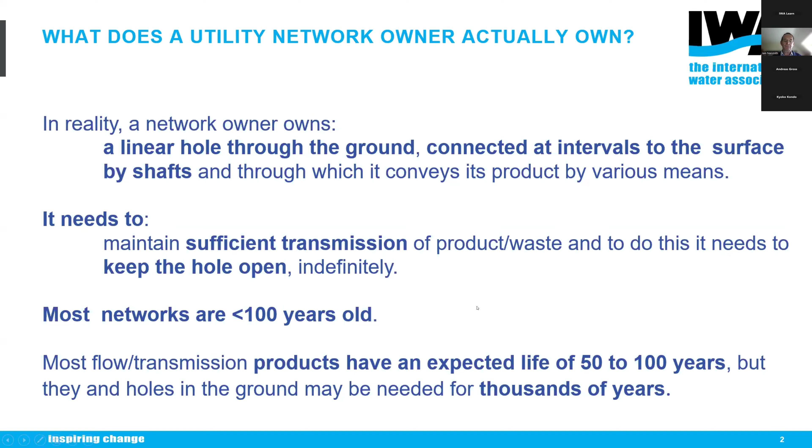So when we look at an urban or indeed a rural environment, the things which allow us to have this civilization relate very much to the utilities that we must connect. And so the first thing I would say about the ISTT is we are a society for all utilities, not just water. So it's gas and district heating, it's electricity, water, wastewater, communications, and let's not forget urban drainage.

And when you look under the ground, you will find a vast array of pipes laid out, as most of you will know, not normally looking as neat as this does in our diagram. By the way, these diagrams are on the ISTT website if you wish to use them. It's a real mixture down there. We don't know what is there. We don't necessarily know where it is.

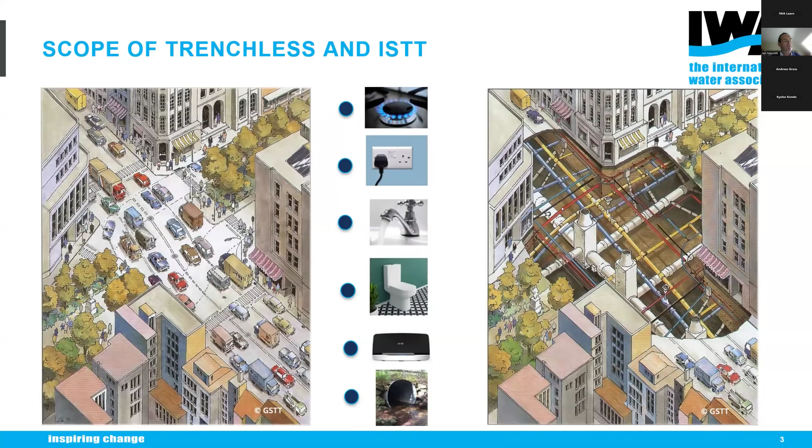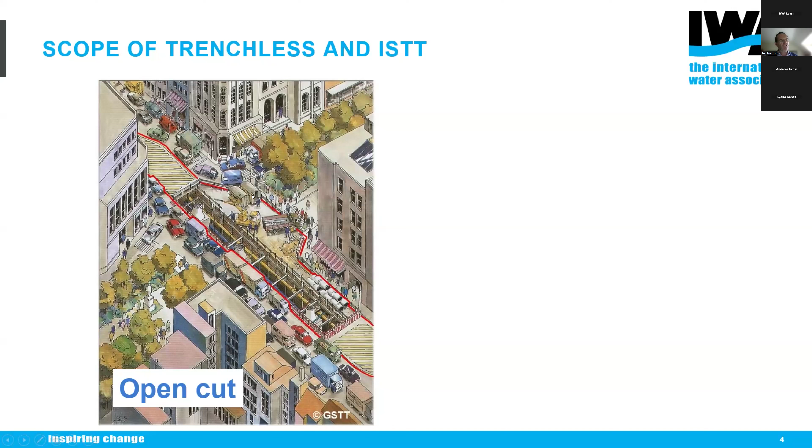And ideally, we don't want to have to dig it up because our conventional method of dealing with it has been open cut, where we excavate a trench big enough for humans to go inside to do the task. In this case, this illustration is laying some new sewer pipe and manholes, and it causes disruption. The role of trenchless in this instance is to reduce this.

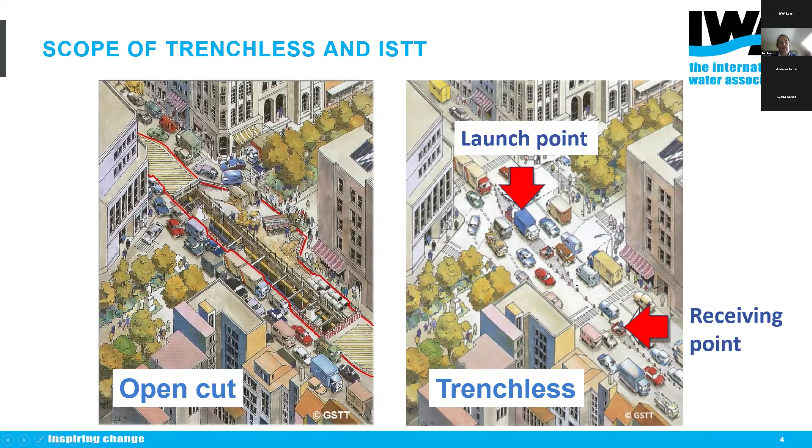So with trenchless, we're looking to have a launch point and a receiving point for whatever exercise or technology we are using that minimizes this amount of disruption that is going to take place. And so what we then have to consider is what are all these technologies that we are calling trenchless? And as a result of decades of work at the ISTT, we've come up with a sort of breakdown of what we consider to be trenchless.

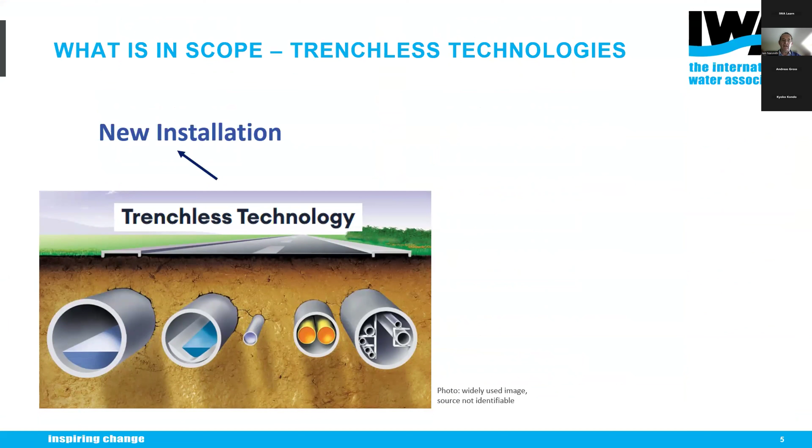So when we look at trenchless, we see that, first of all, it's about new installation. It's about trying to put either new mains or property connections in without having to disrupt the surface. We then have to consider how do we keep all this maintained over the long term? And we call this rehabilitation. That's the title it falls under for us.

And there's three elements. We're going to repair localized issues. We're going to renovate as we need to, to extend the life. But at some point, we're going to have to replace. So those are the three areas of rehabilitation.

But in order to be able to decide where we're going to install, and how we're going to rehabilitate, we need to understand the condition of our asset. How is it deteriorating? What are the problems that we've got to address? And we also need to understand what we call site investigation, which is perhaps where we want to access it or where we want to drive a new pipe through. We have to decide what's the safest route. We have to decide what's the best technique. So these are the three areas of trenchless technology.

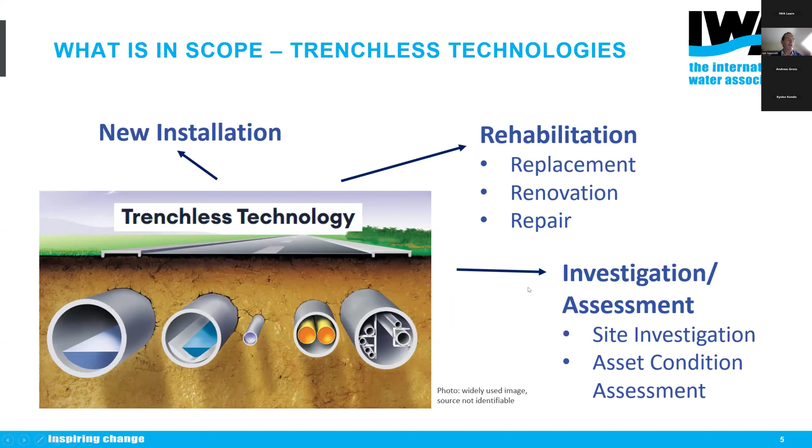Now, there are a number of advantages or reasons for using trenchless over open cut. One of the most obvious ones, which is most frequently cited for the urban situation, is reduced disruption. So traffic, pedestrians, businesses, access to people's buildings, minimizing the disruption to other utilities whilst we're doing our work, and also not interrupting drainage, because cutting trenches can interrupt natural drainage processes within the soil.

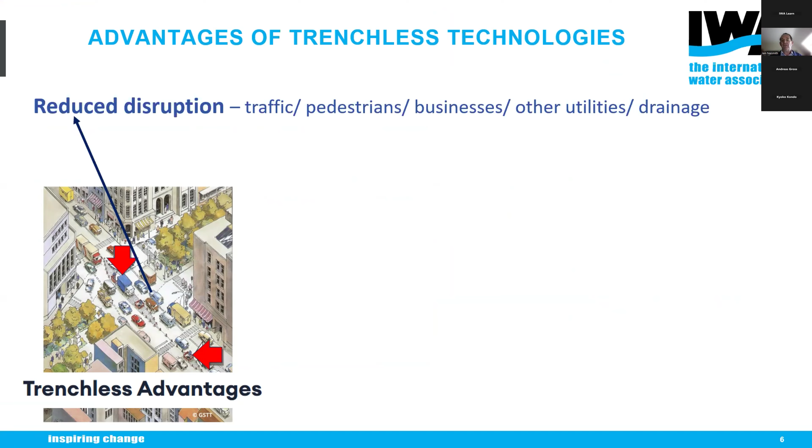Now, a customer services director from one major utility came to one of our events to present, and she started off by saying, "Guys, I love you." And the reason, she said, was because whenever her company uses trenchless, she gets fewer complaints from customers that her team have to deal with.

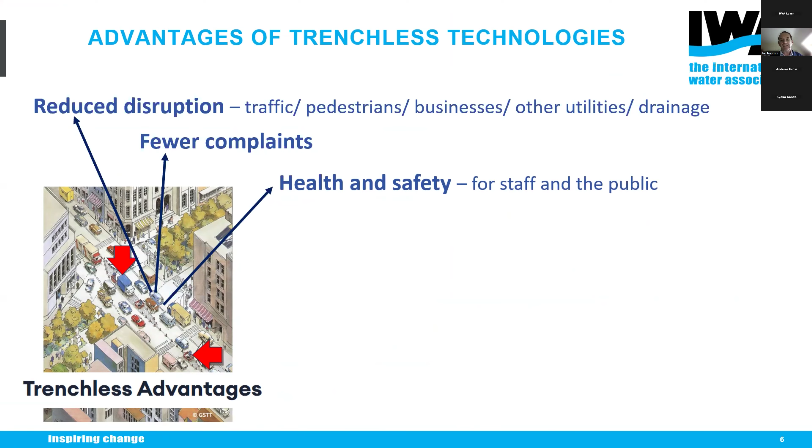But another bigger important aspect of this is health and safety. When we dig trenches, when we put people in the ground, we risk the health of staff, and we open up a risk for the public accessing those holes that we have dug.

And then again, moving on from that, we've got the whole issue of environmental damage, air pollution, noise pollution, the waste that comes from excavating. And I've got tree root damage here as well. Increasingly, it's not just the underground, it's the trees that we're interested in.

The trees' roots are underground as well. Everybody wants trees for human well-being, and also they help with climate change and with dealing with rainfall. And so we want to minimize damage to those. All of this can reduce carbon footprint with less road opening, less traffic congestion, reuse of infrastructure, less replacement.

And from a utility perspective as well, apart from the complaints, it's the costs. So as a generalization, it will vary, using Trenchless may reduce project costs. It may be quicker. If you've got to pay for road rental, we don't have to rent the roads. We don't have to deal with reinstatement of the surface, and perhaps it reduces compensation claims. So there's a range of advantages to Trenchless.

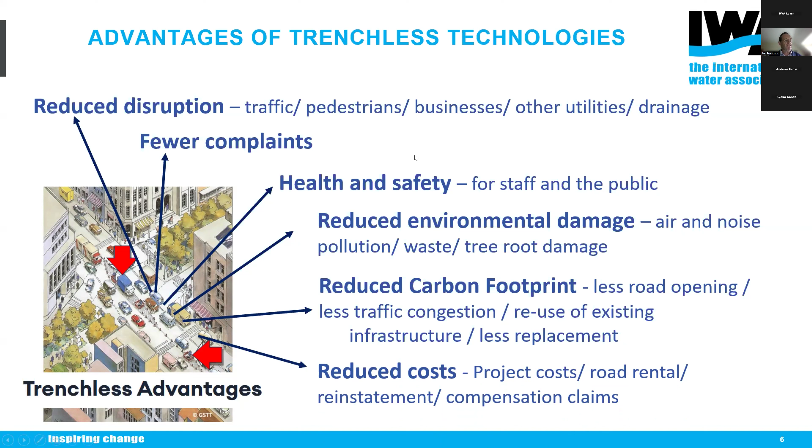And this is one of the other aspects of the society, trying to make these known, but also to provide the evidence for this. And you will find all of these listed on our website.

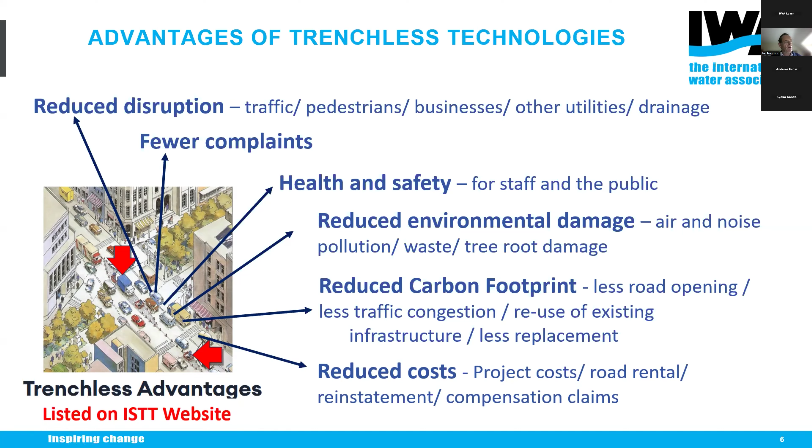So, what about the society? ISTT is essentially the umbrella organization for a group of 28 national societies. We're spread across the whole of North and South America, very heavily concentrated in Europe, down through China, through to Australasia. If you haven't come across the societies, you may well have come across events titled Trenchless or No Dig. These events, which are usually exhibitions and conferences, invariably have either the ISTT or one or more of the national societies involved with them.

And that is not to say that Trenchless is not used in all of the other countries. These are where there's been sufficient interest to form a national society. And they come together under the ISTT, and our secretariat operates out of Australia and Japan.

If I go on to just mention ISTT's objectives, this helps you to understand the society. It's about advancing the science and practice of Trenchless technology for the public benefit. And it's about promoting education and training for the public benefit. So although our membership includes the utilities, the consulting engineers, the contractors, the distributors, the manufacturers, we are not a society for any one group like that.

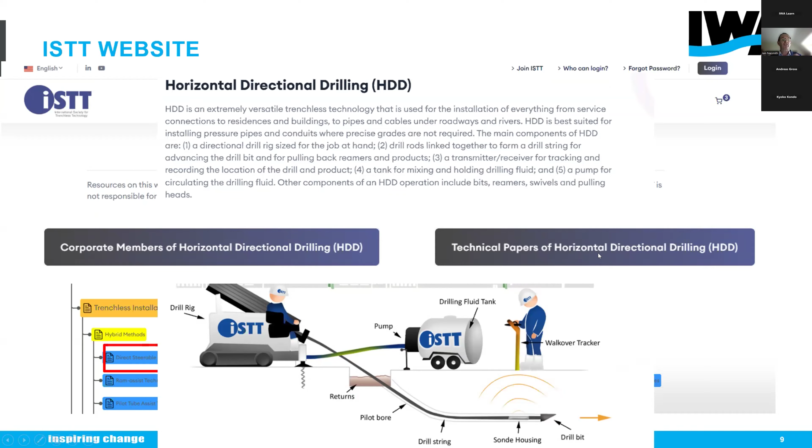So it's a case of utilities potentially becoming more informed customers, and this Trenchless page enables you to do that. You can click on any of the technologies and you get a description and usually a diagram. In recent developments on the website, we're gradually populating which of the corporate members can do each technology, so it's an easy link to talk to people who can provide it. And also technical papers from our archive of some 2,000 papers that relate to that.

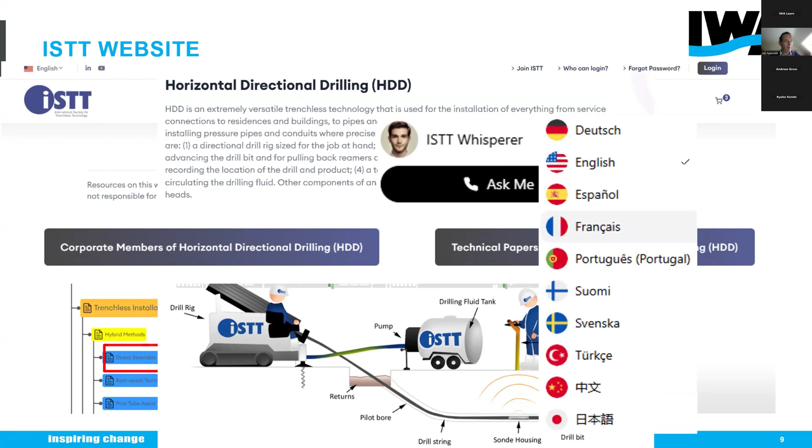To make it a bit easier, we've got an AI assistant who will listen to you and speak to you in a whole variety of languages. And so this brings me on neatly into the second part of this presentation, which is about the Trenchless technologies.

So we have, as I mentioned before, site investigation, which we split into asset condition and site investigation. We have the three types of rehabilitation, and we have the new installation. I'll start with the asset condition assessment, and basically we are able to do this from within the pipe and also from the surface.

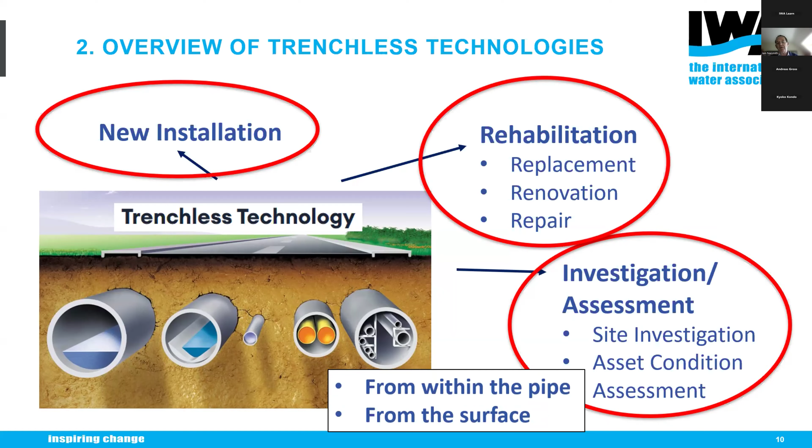So when it comes to condition assessment, and throughout the rest of the presentation, I've just cut and pasted the relevant button off our Trenchless Technologies webpage, so it's easy to relate to where you will find the relevant information. So if we know condition and we understand deterioration rates, it helps us to make decisions and to financially plan for maintenance, repair, rehab, and replacement.

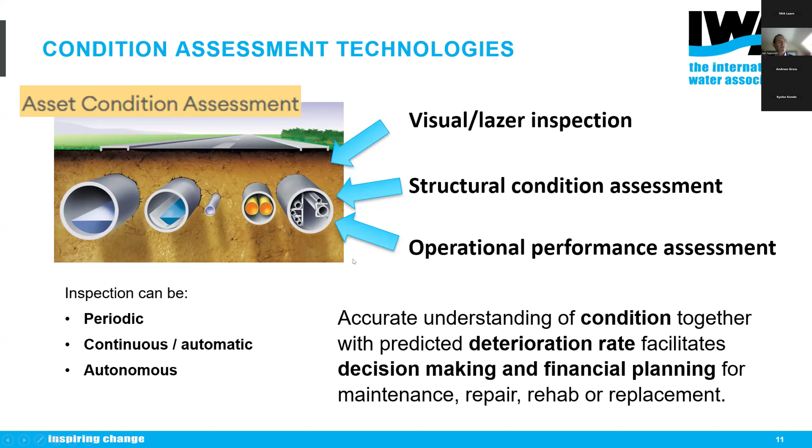We can do this periodically, we can do this continuously, or I think what is coming along, autonomously. If we're going to keep these pipes open for the next couple of thousand years, we will be moving to a position where autonomous robots will be helping us to make these pipes last longer. For condition assessment, we can use visual methods, we can look at structural condition, and we can also use operational performance to assess the status of the pipe. So we'll have a quick look at those.

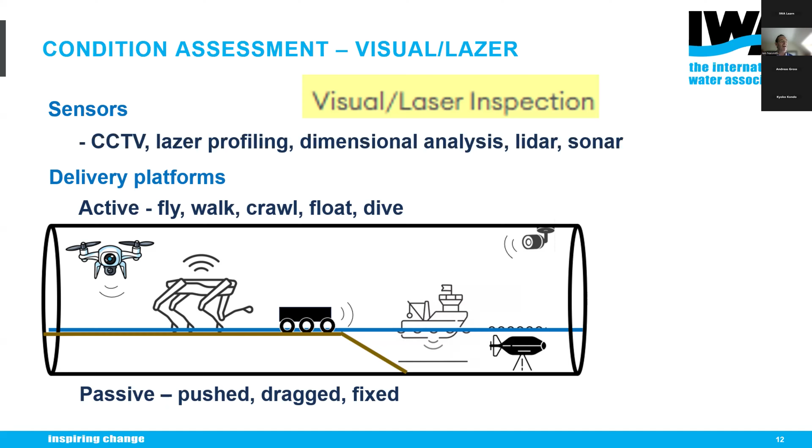So when it comes to visual, we've got a whole lot of different sensors which can create visual impressions for us, but we need platforms, a whole variety of them, in order to deliver them. We can fly them, walk them, crawl them, float them, or dive them through pipework. That's fairly active, or we can push them, or they can be pushed by the flow of liquid. We can drag them, or they can be dragged by a parachute along the line of the pipe when it's flowing, or we can have fixed sensors.

And just a brief mention here as well. This gives a bit of a feel. Where we've got man access chambers, these things can avoid the need for man access. Apart from the reduction in the number of people, it's also the fact that we haven't got to create a safe environment for a human to enter, because the drones do not need that.

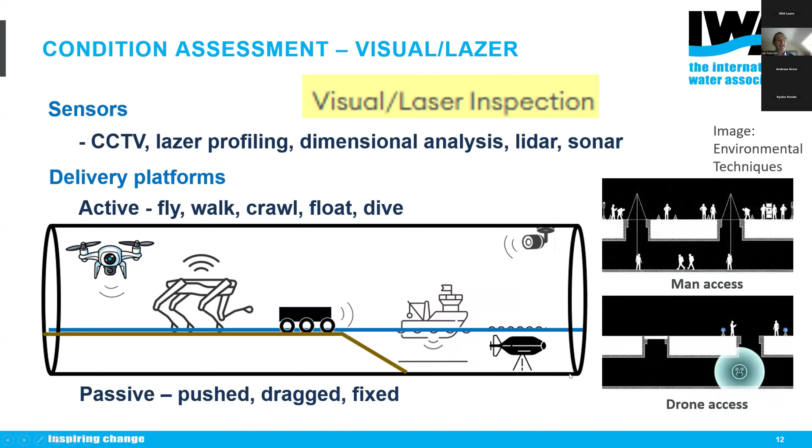So perhaps the most common we all know of is crawler CCTV for visual inspection. And this has been interesting because it's been at the forefront of AI for this industry, with the use of artificial intelligence to interpret the visual signs and to classify the damage. And this has been going on for some years now. And another recent development, which is probably of great interest, is the advent of the pole zoom camera.

So when you have to open up and look down into your asset for some reason, a zoom camera on the end of a pole allows you to look upstream and downstream. It allows you to focus your way up and see the tree roots and the leaks and the local wildlife. And this is starting to be used as just a routine measure for getting more data.

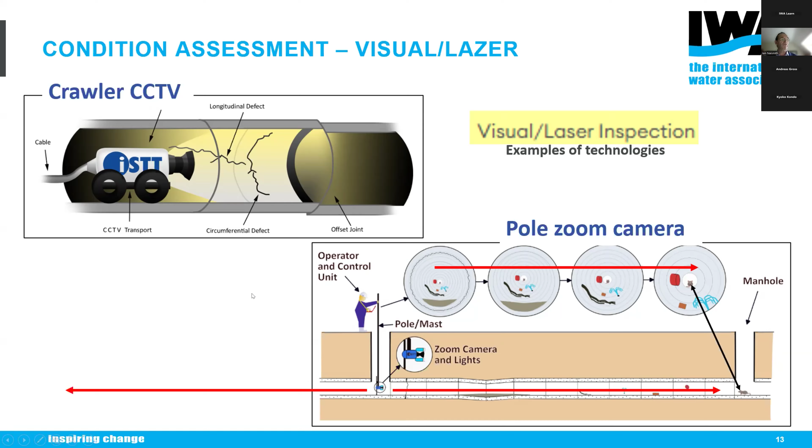So moving on from the visual, we've then got structural condition assessment. And under there, you will find that we have separated out into ways of measuring wall thickness, ways of measuring the structural response of the pipe, and also external void detection. So again, there's multiple methods.

One thing I would just say, at the UKSTT, we have a group called the New to Trenchless Network, which is our equivalent of young professionals, but we make it for anybody of any age for learning about this. And we normally divide the three areas of trenchless into three two-hour presentations, six hours. So I'm trying to do it in about 20 minutes to touch on that. So I cannot explain all of the technologies, but the information is available for you if you would like to know more on our website.

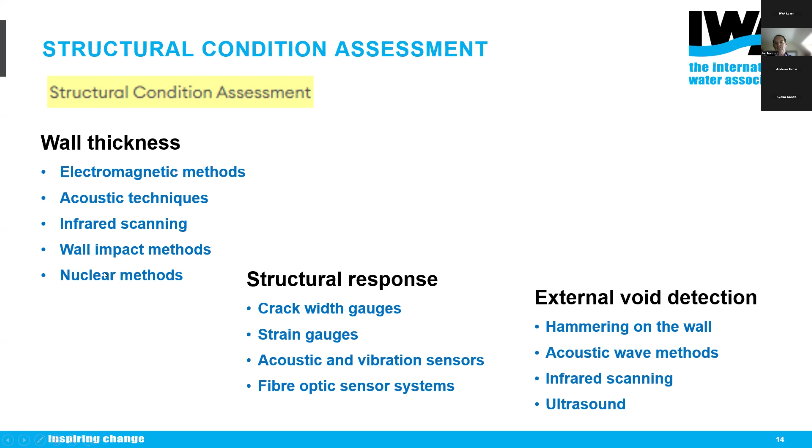So with wall thickness, electromagnetic, acoustic, infrared, we can whack the wall using impact methods, and nuclear would be things like X-ray, etc. And so an example would be a smart pig with a magnetic sensor in it going through and, say, detecting changes in wall thickness. We can use various gauges, etc., to monitor structural change within the pipework. And external voids are extremely important. We often just think it's the pipe.

It's not. It's the pipe and soil complex. The soil is supporting the pipe. And if there are voids in it caused by infiltration, exfiltration, or whatever, it's an issue. And so we have to have methods of discovering that.

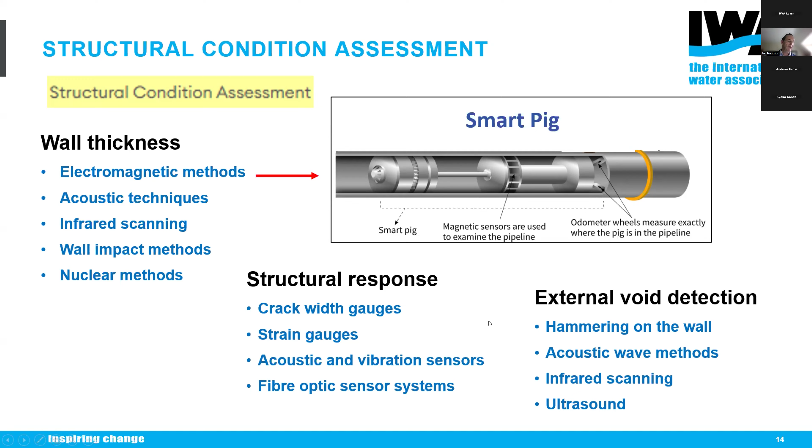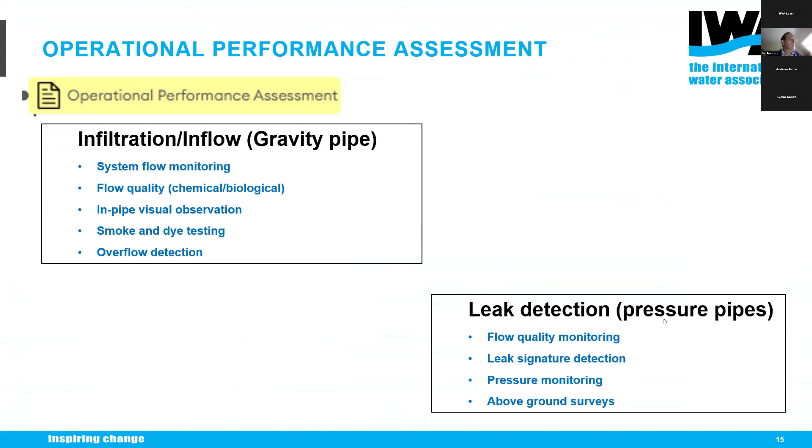And so the final of the 3 areas is operational performance assessment. And with this, we've got things like infiltration and inflow within gravity pipes, and we've got things like leak detection from pressure pipes, from gases, from water, etc. Again, a whole range of technologies, including some fairly basic and potentially seen as old-fashioned smoke testing as an option. And with leak detection, things like looking for the leak signature.

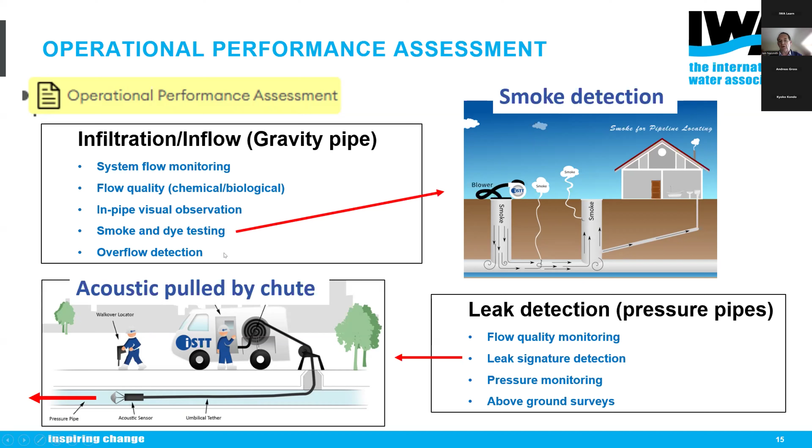If we basically put all of these together, we are generating data sets on condition. And these are increasingly being used as a basis for AI. So things like overflow detection, storm sewer overflows, artificial intelligence monitoring those and identifying where there are issues. So all of this is about generating good data, which AI companies can then utilize to give us new tools.

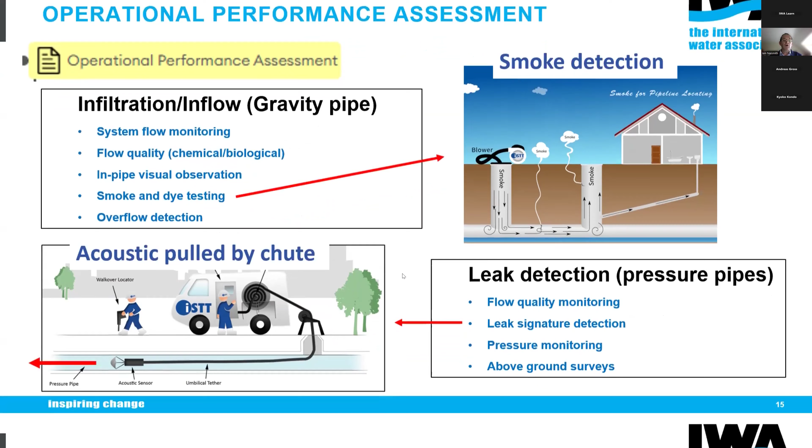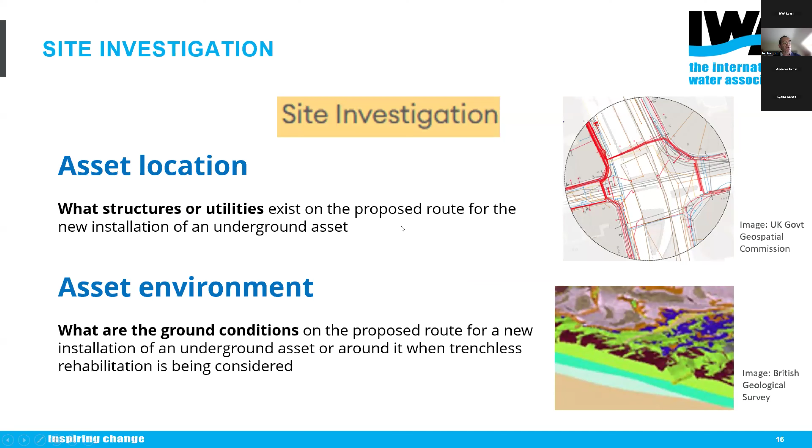So I'm going to move on to the generation of information about the site. We divide that into 2, asset location and asset environment. We want to know where the pipes are, but we also want to know what the ground conditions are around them. So with asset location, just a bit of an example here, and I think 1 or 2 people on the call may recognize this because it is their picture.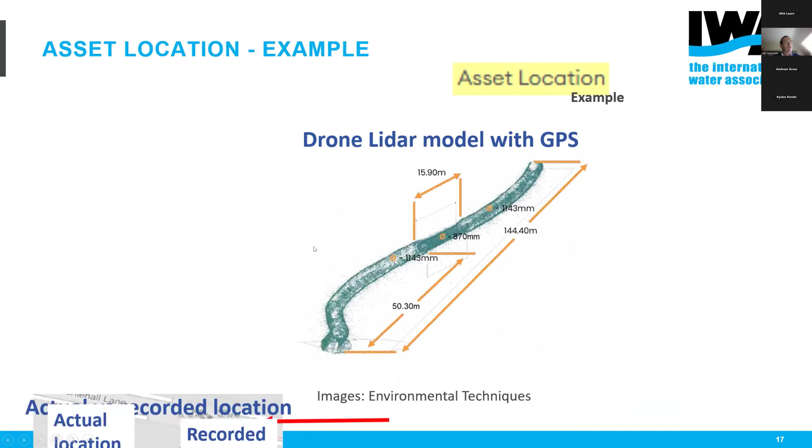This is a drone delivered LiDAR model with GPS of a sewer pipe, and it's showing the 3 dimensions, its location. Here is what was recorded on the utilities map, and here is the actual location that has been discovered. Quite important if you're deciding where you are going to dig. But also what we want to know is lengths of pipe of different pipe materials and changes in diameter. And in this case, it found an unexpected small diameter brick section right in the middle. I believe it was possibly considered to be repair of bomb damage from the Second World War.

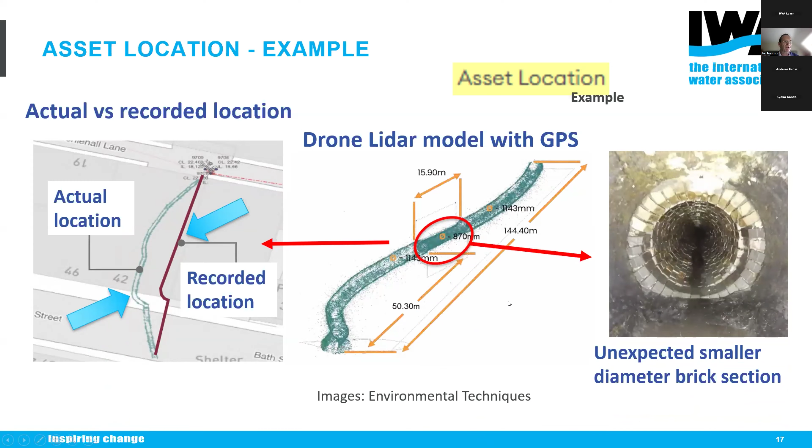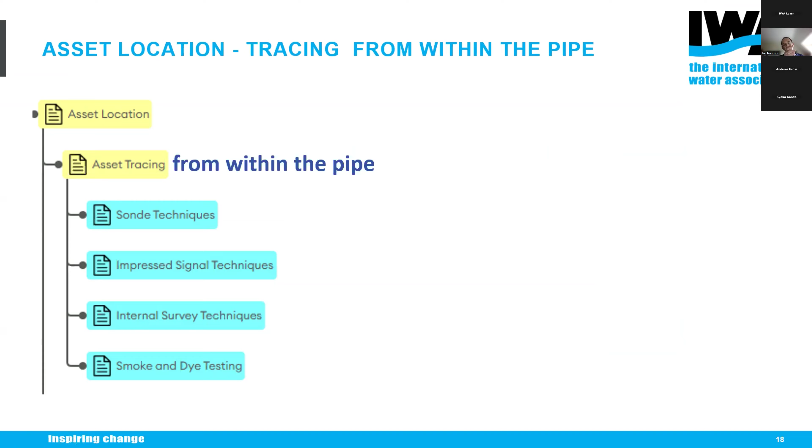But there's a whole variety of ways that we can also trace a pipe from, or trace from within the pipe. There's sonde, impress signals, various internal survey techniques, and again, the smoke and dye testing. You will find when you look at our website and when you see my presentation, some of the technologies get repeated because they're applicable for different purposes.

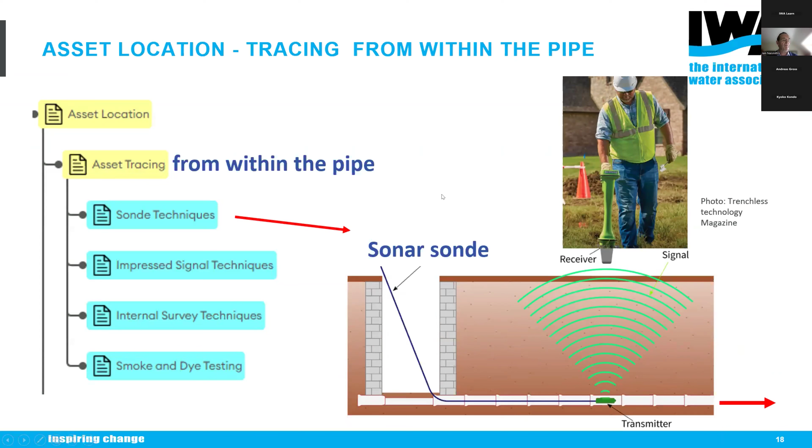And so just to give an example here with the sonde, we're using sonar retrieval at the receiver at the surface, and we're able to monitor where the pipe is, or we can be able to monitor perhaps a piece of equipment that we really want to know its location as we're going ahead. So that was from within the pipe, and we're proceeding from left to right there.

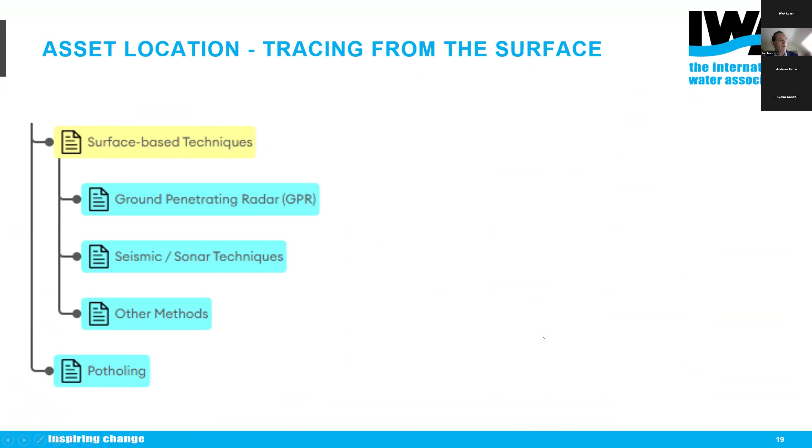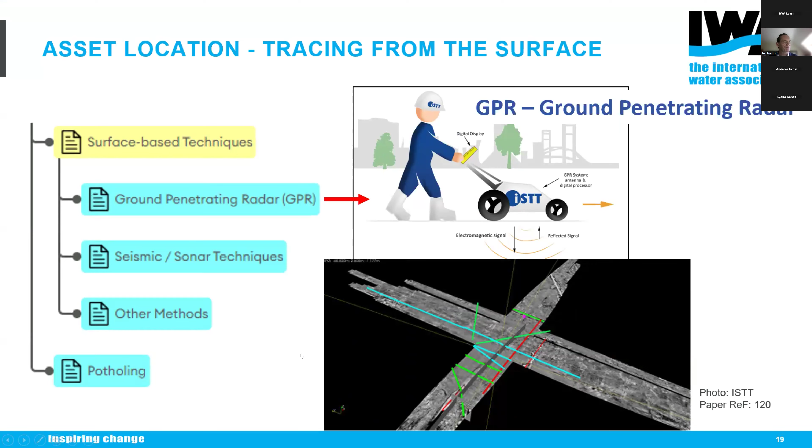If we then look at outside the pipe, it's the things like ground penetrating radar and seismic and sonar techniques. Fairly well known and understood, but it all helps us to build a picture, not only of where the pipes are, but also what is going on around the pipes, which again brings me on now to asset environment. If we look at asset environment, we've got four major areas that we use.

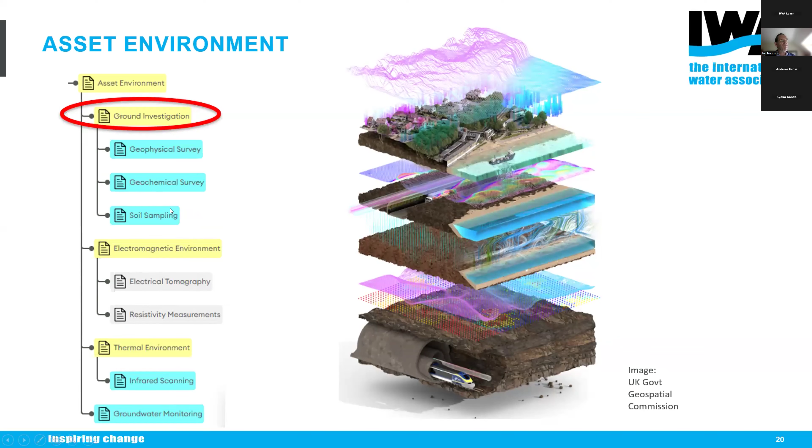But if we look at the ground investigation, it's things like geophysical surveys, geochemical surveys, and soil sampling to understand the soil. When it comes to the electromagnetic environment, there's a number of ways using resistivity meters, etc., and probes to determine what is going on. And here, obviously, if we were looking for somewhere to lay a new utility, we'd probably be looking to go here through the clay area.

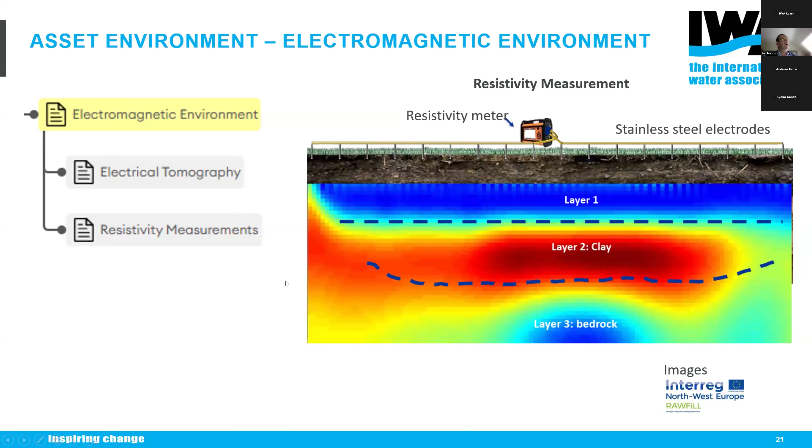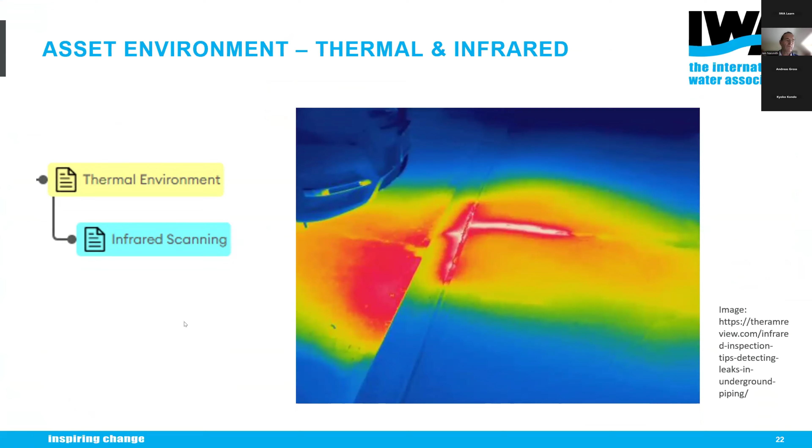And the final of the four methods, really, of looking at the asset environment is groundwater. Now, groundwater is incredibly important, particularly its depth. It helps make decisions about design and construction. And its quality can also give us some indication about what the long-term performance of our pipe might be, particularly if it's, say, an aggressive water.

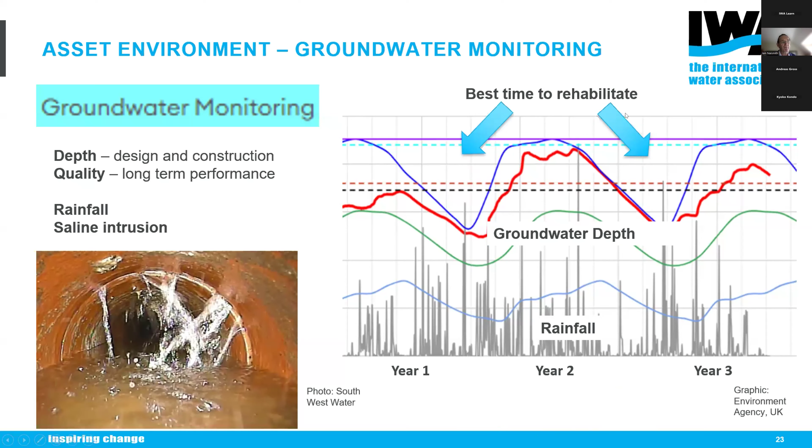And let's not forget, it's not just rainfall. We're also looking here at saline intrusion. So we're getting literally groundwater that appears twice a day in some coastal locations. Groundwater depth, therefore, is quite significant. And the behavior over the annual cycle of groundwater helps us make decisions about things like the best time to rehabilitate, which allows me to move neatly on into the rehabilitation.

So rehabilitation, we have repair, structural and non-structural. We've got renovation, upgrades to structures, and we have replacement of a new pipe or the functional equivalent along the same alignment as the existing pipe. Now, with repair, structural and non-structural. Structural would be where there's a collapse. Non-structural might be where there's a leak that we wish to resolve or an infiltration.

And with renovation, we're basically upgrading. So it could be that we're extending the life structurally or trying to give it a little bit more strength, or it could be that perhaps we're replacing an anti-corrosion layer on the inside to update the pipe and to extend its life. And the interesting thing to see is just how long can we do this over the next hundreds of years with the pipework that we've already got.

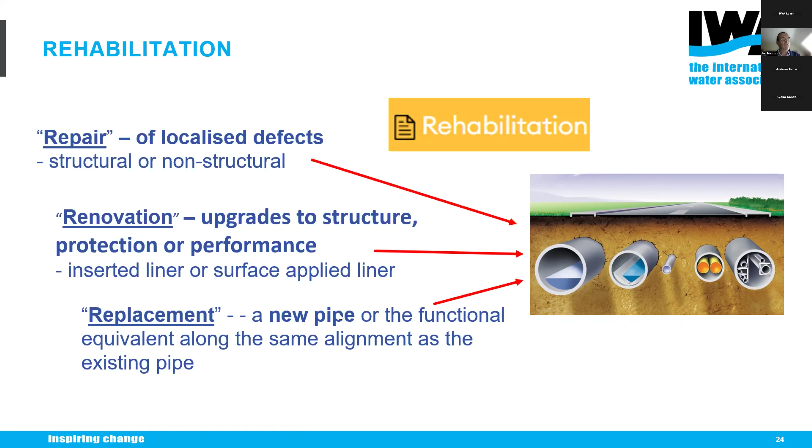And with the replacement, we really want a brand new pipe or the functional equivalent thereof, but along the same line. So if we're going to put a second pipe in or alongside it, that's new installation. But if we're going to just replace what is there trenchlessly, that is replacement for us.

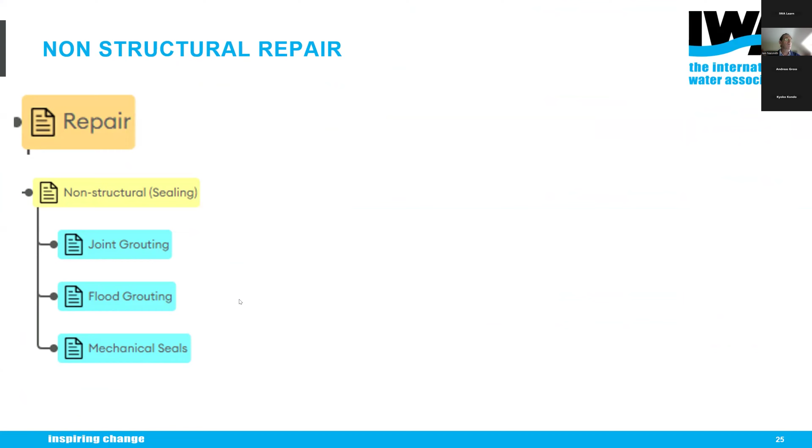So when it comes to repair, let's start with the non-structural. So something like dealing with infiltration into a sewer. There's various grouting methods. These are very catch-all titles. You may find a lot more detail and a lot more different applications for them within the information that's available on the site. I've just picked out this one here as joint grouting. So here we've got a void around a joint that we want to fix.

So in goes a packer, and it's inflated either end to block the pipe. We then put through a grout, and that goes out into the void, fills it, and then when cured, we can remove the packer. And hopefully, therefore, the problem is resolved. And we can do the same thing here with a different shape packer to do a lateral connection.

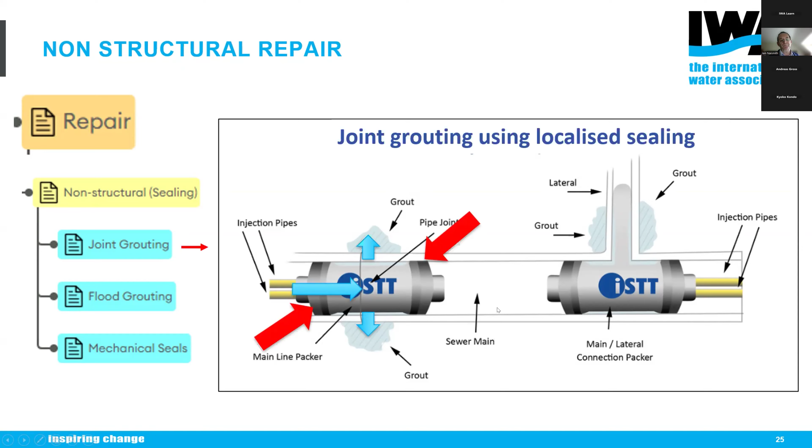When it comes to the structural repair, there are a range of possibilities. And one that I picked out just here, as an example, is cured in place patch repair. So here, they're wrapping a long strip of felt around a packer. It's been impregnated with a resin that is not yet cured. It is inserted into the pipe to the point where the break is that we want to fix.

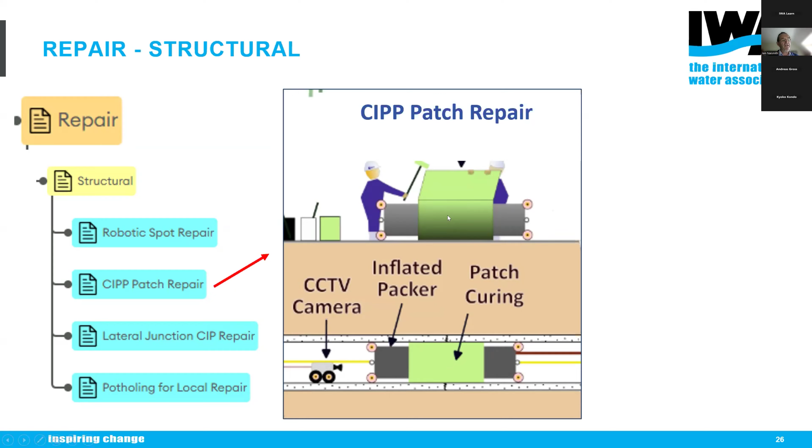The packer inflates, and we then await the curing of the patch, and then the packer can be deflated and removed. And we're left with essentially a new section of pipe here, which is resolving the issue. This can be used for non-structural things like leaks, or it can be used structurally, but the patch has to be designed accordingly. We can also use these for lateral junction repairs.

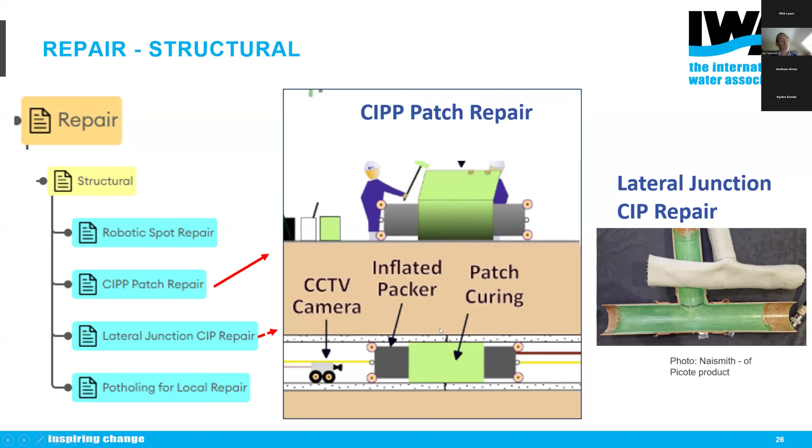This is an example of a piece of felt, a sock which has been designed or shaped to fit into a lateral connection. It hasn't been impregnated yet with resin, but this shows a cutaway version of what you have after you've installed it and removed the packer. Again, a new piece of pipe dealing with a joint. It's a sort of similar approach to grouting, only in this case we're creating a piece of pipe rather than pumping in the grout.

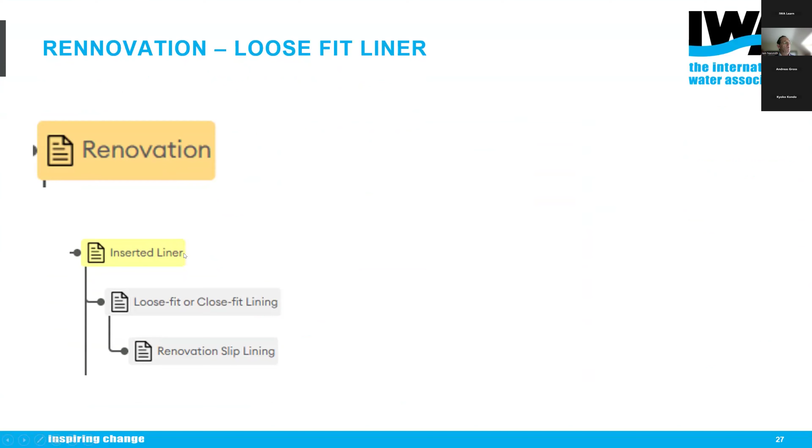So we've looked at repair. I'm just moving on now to renovation. And with renovation, this is where we are extending the life. And there's a couple of ways of doing it, one of which is with a loose fit or a close fit lining. So when it comes to loose fit, this is where, for example, with continuous slip lining, we pull in a new pipe which is of a smaller diameter than the existing one. So the existing pipe remains where it is, but a new pipe comes through. Obviously, there will be a reduction in cross section.

This can be done either continuously, or here's another approach, which is we do it segmentally, where sections of pipe are lowered, and then they are screwed, fixed together, and they are inserted one at a time from one end and pushed through the pipe.

There's been a lot of innovation with trenchless, and one of the reasons we've realized why some people are a bit reluctant to adopt it is they think it's a bit innovative, it's a bit risky. It could be that the whole trenchless industry has been too good at coming up with new ideas continuously, but there are many well tried and tested. And if you're interested in a technique, you can usually find, and we hope the ISTT website will help you find, either academics or consulting engineers or contractors or even manufacturers who could give you some advice about that.

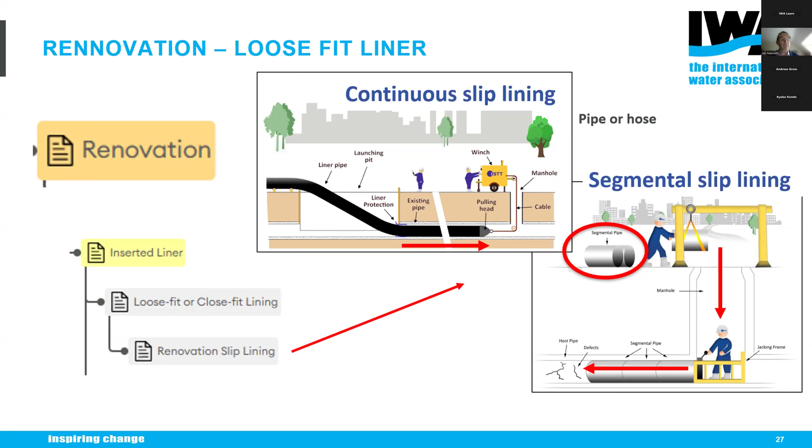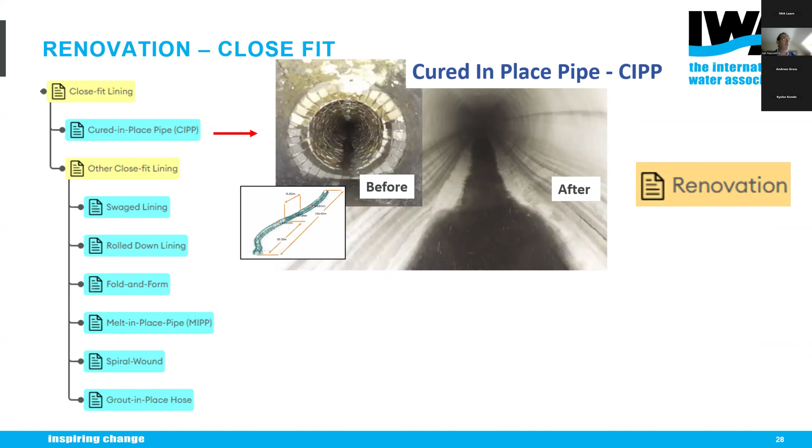A lot of the rest of them rely upon the flexibility of plastic. And you can squeeze down a plastic pipe to a smaller diameter, pull it in, and then allow it to reform and to expand. Or, as in this case, you can fold the plastic pipe up, drag it through, and then inflate it. And there's spiral wound methods and others melting in place, which can be utilized. As I said, I can't cover all of the technologies today. I want to give you a flavor for the different types and maybe to help you understand why we've grouped them in the way that we have on the ISTT's website.

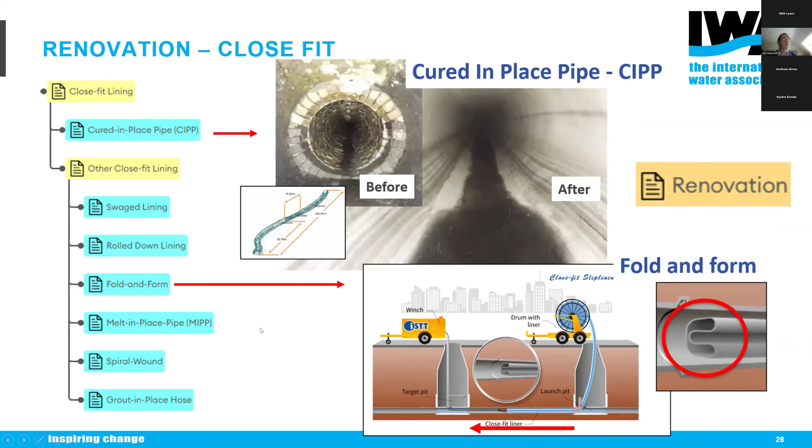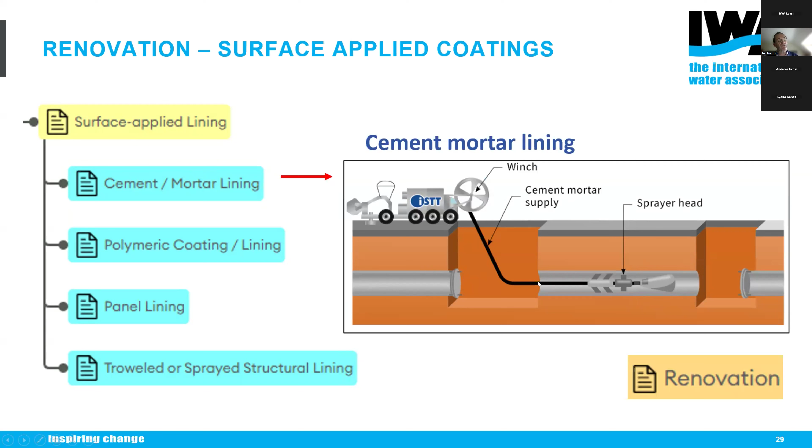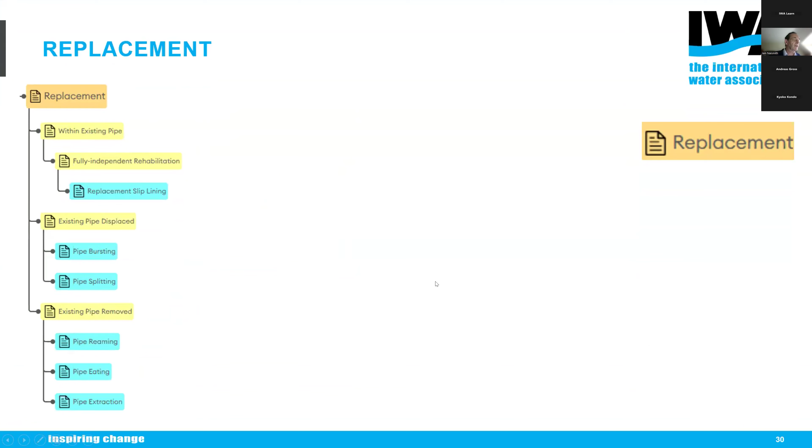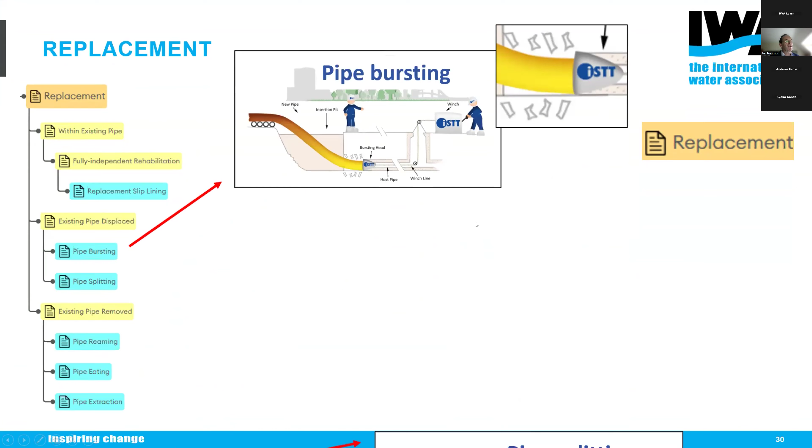And so with the replacement, we have a number of ways that we can replace existing pipes. We can burst them, literally shatter them and pull a new pipe through and leave the pieces in the ground. We can split them and drag in a new pipe behind, again, leaving them in the ground. So this would be pipe bursting, pipe splitting. And we can do things like pipe extraction, where we literally pull the old pipe out and pull in a new one. Good example would be a lead service pipe. We pull out the lead and we pull in a brand new service pipe behind it.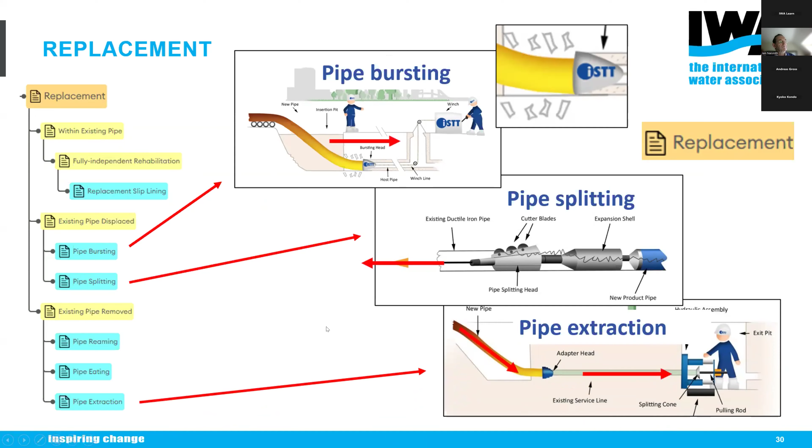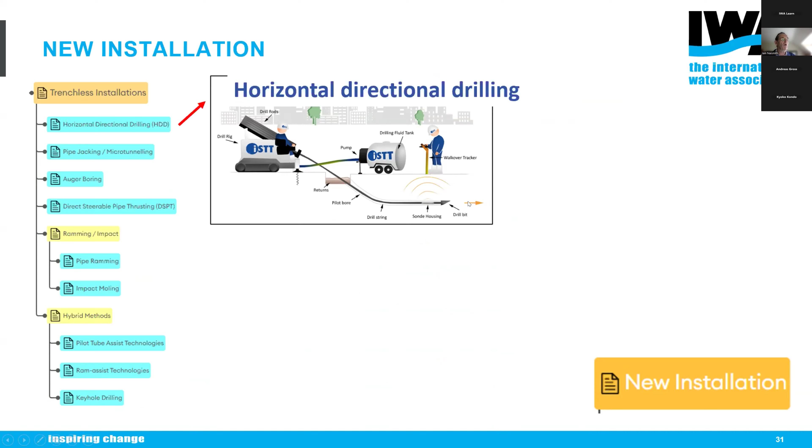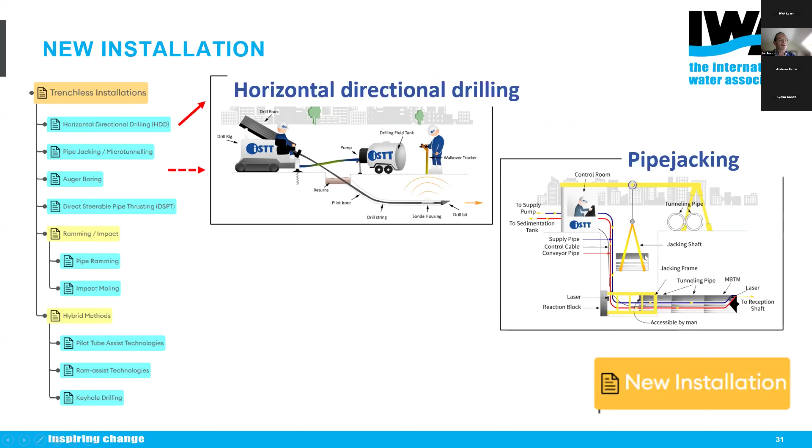On to the final of the three technologies, which is new installation. Here, it's a variety of ways in which we can stop digging up and we can install as much as possible by creating the holes and pulling things in, or by pushing the pipe in as we create the holes. So a very common one is horizontal directional drilling, where we use a drilling fluid to support the use of a spinning drill head, which can be directed and which will therefore cut a new hole, and it can be used very extensively up to quite large diameters. Another example would be pipe jacking, a bit like the segmental lining I was just showing before, only in this case we are actually combining the segments.

I think we just lost Ian. Andreas, can you contact him? Because I can see him here. Yeah, I can see him as well. Yeah, I will try to get a hold of him. Sure. What happened? Thank you.

Hi, Ian. Hello? Can you hear us? We lost you in the middle. Well, I suddenly had a message that came up saying recording in progress, and it then cancelled my audio. Okay. When did you stop hearing me? I think the last slide, the new installation slide. Yes, you're on this one. Okay, then. Was it this one that you missed me on? Your screen is not shared. Can you share it again, please? Yes, something odd happened there. Okay. No worries.

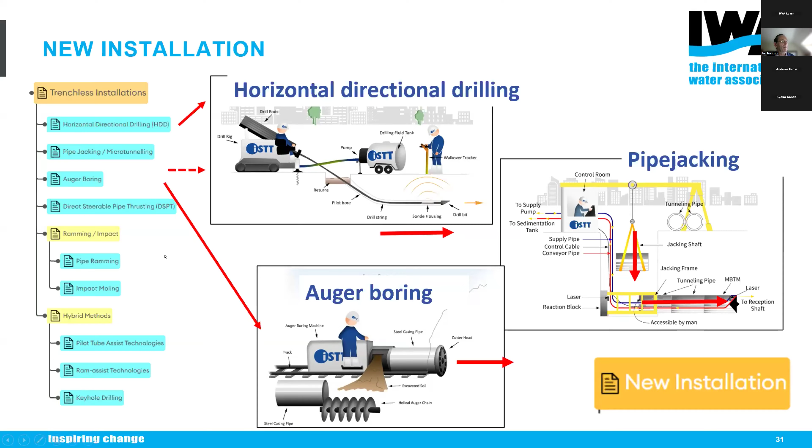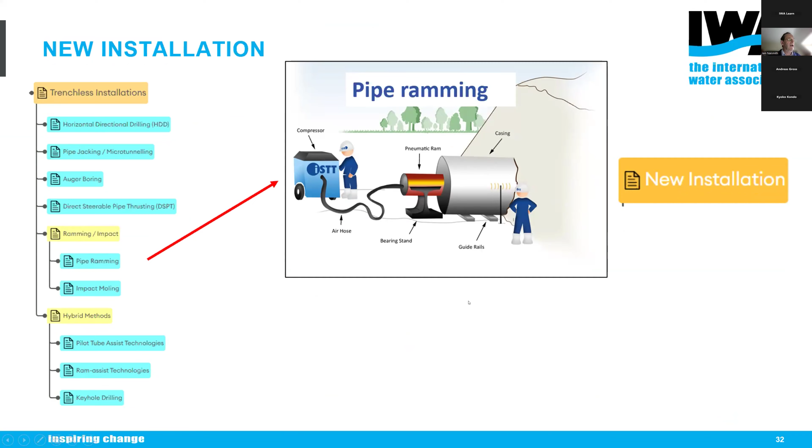If I move on to the ramming and impact methods, we have pipe ramming, which is where, instead of actually having a tunneling head, we're pushing pipe in and then the soil is contained within it and is removed. And impact moling, where basically a mole is gradually forced through the ground and creates the hole from one pit to the next.

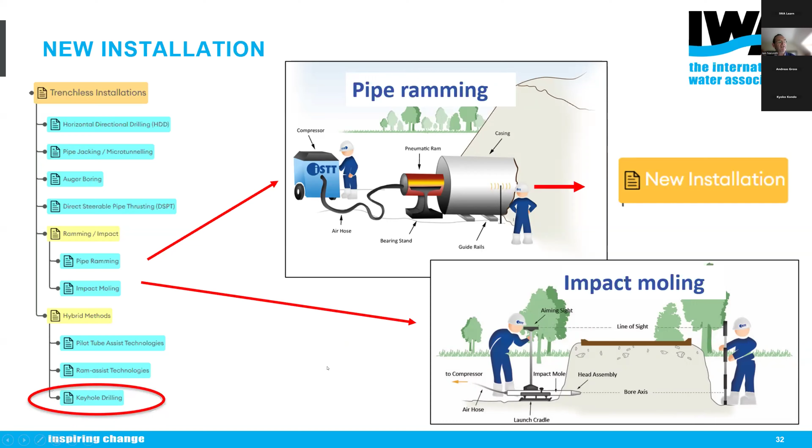And what I would like to finish on is keyhole drilling as an example, because it also brings in potholing and brings together some of the technologies and the ideas. So here we have a house, a garden, and out here at the road, we're using keyhole drilling, potholing rather. Rather than disturb the entire road, a small piece of the road is cut out and removed. We use various techniques like vacuum excavation to go down and create a pit into which a keyhole drilling machine can be inserted.

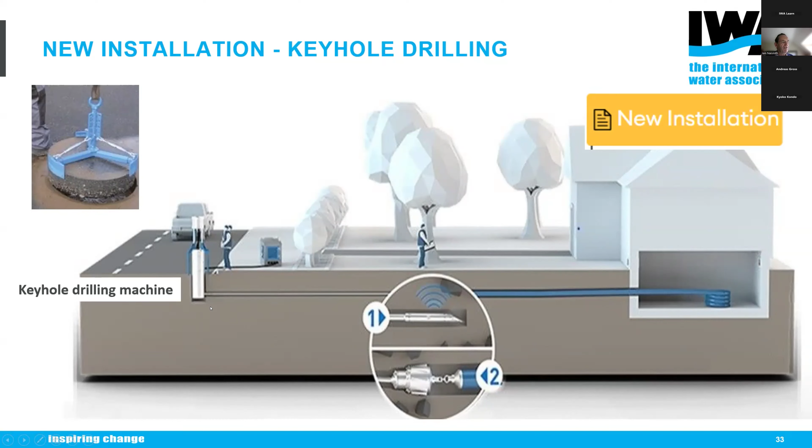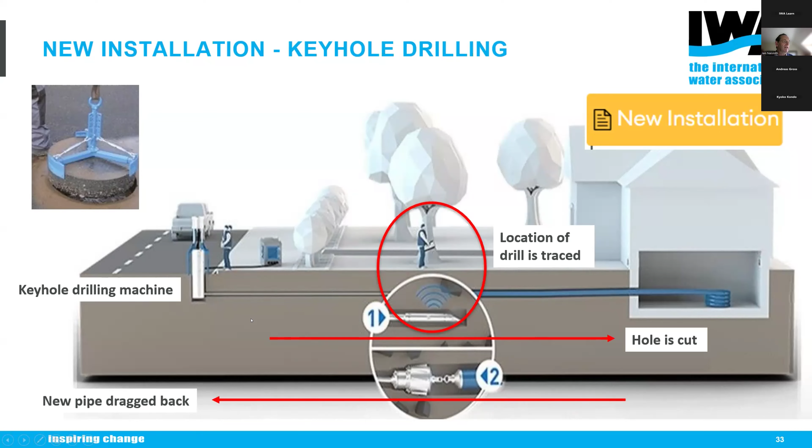That drilling machine can then cut a hole all the way to the property. Along the way, we have yet another guy tracking its progress so we can see where it's got to. You then attach the new pipe from the property and you can draw it back. And to finish the whole thing off, having removed the keyhole drilling machine, we can use long handle tools.

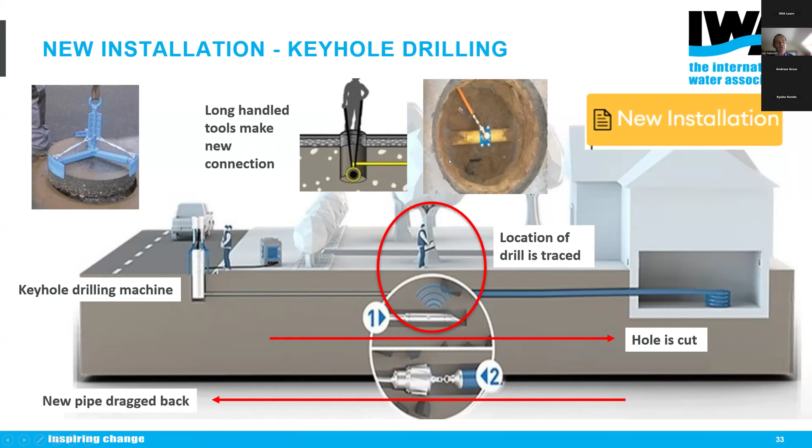And this is another method, this sort of potholing method. This is not so much no dig as low dig. We are interested in low dig technologies. And what we're starting to see is a lot of long handle tools, really developed perhaps for the gas industry, but of interest to other sectors as well, using long handle tools down a small hole to effect a connection. So this sort of brings all of the technologies together.

And as a summary, hopefully you've got a very brief understanding of the society and who we are. I hope you can go away with a clear understanding of new installation, rehabilitation, and site investigation and assessment, that these are the technologies. And what we're seeing now is a lot of AI coming in, and there's a lot of innovation across all of this continually going on.

I hope you've got a clearer idea of some of the benefits and also the resources that are now available from the International Society. And we look forward to getting your feedback, to hear what else you would like to know about from the Society, and your thoughts about how the IWA and the ISTT can work together going forward.

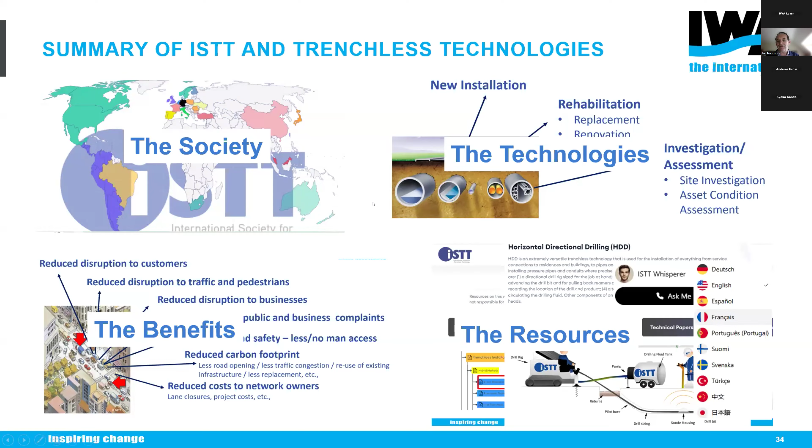Apologies for the slight problem halfway through. Something happened to the projection. And thank you. Over to you, Andreas, I think. Ian, thank you so much for your presentation. I think this was very informative, giving a first overview of our ISTT and trenchless technologies. We have a couple of questions that came in.

One from eFeed asking, can trenchless technology be applied to all kinds of soil, including sand and silt?

And I think the answer is yes, because actually quite a few of those technologies which I have shown you are best applied to soft materials. You would need something which, as it goes along, is opening and holding the pipe, the hole in the ground that you're creating, open. And we go right through to the more difficult stuff with different types of drilling heads and tunneling equipment. You can get through very hard ground as well. So if that answers the question.

There was actually also a follow-up question by Evie asking if it is possible to continue trenching when there is a rock encountered in the path of the pipe, or if there is rocky basalt ground, basically. Well, that's one of the reasons why the site investigation is very important beforehand. If you're dealing with an existing pipe, you're okay, but if you're doing new lay, it is particularly important to have gone through that exercise. And yes, things will be discovered as you go along. It may sometimes be necessary to reroute if it is just not possible to get through.